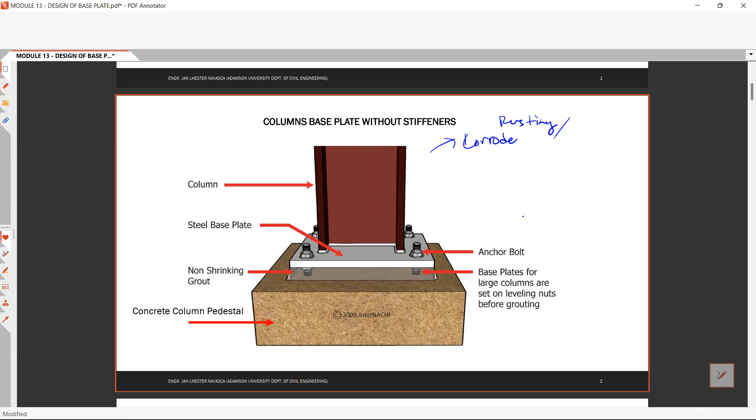You also need to provide non-shrinking grout, meaning you need to provide grout or spacer between the column pedestal.

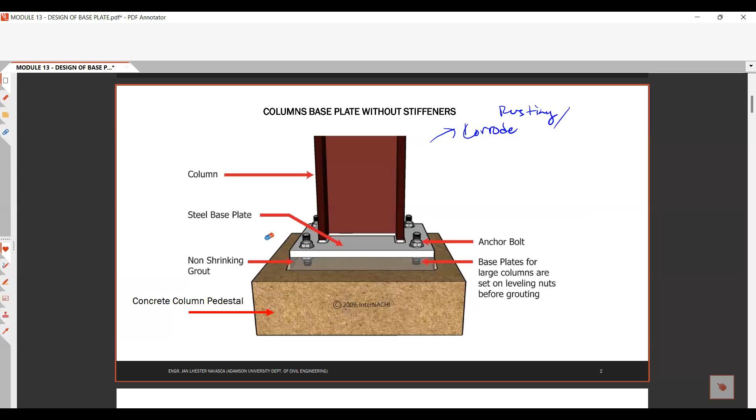For the non-shrinking grout, its purpose is to provide spacing between the steel base plate and the concrete column pedestal. You need to provide non-shrinking grout so that the pressure becomes equal, so it won't settle more on one side versus the other, because you provided a non-shrinking grout in between the steel base plate and the concrete column pedestal.

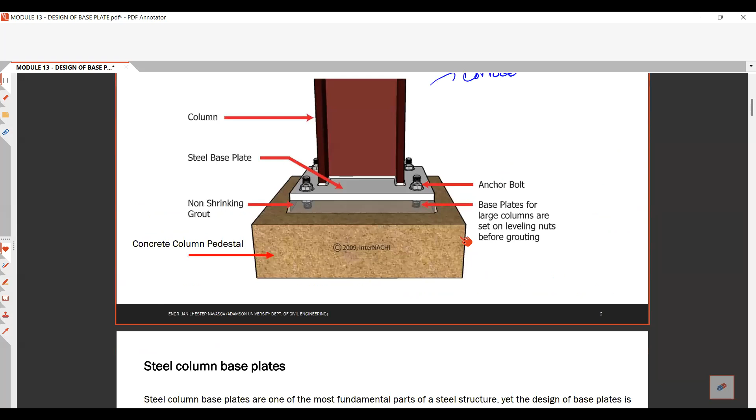So how the anchor bolt is attached in the concrete column pedestal: before you cast concrete, before you pour concrete, the anchor bolts need to be ready already.

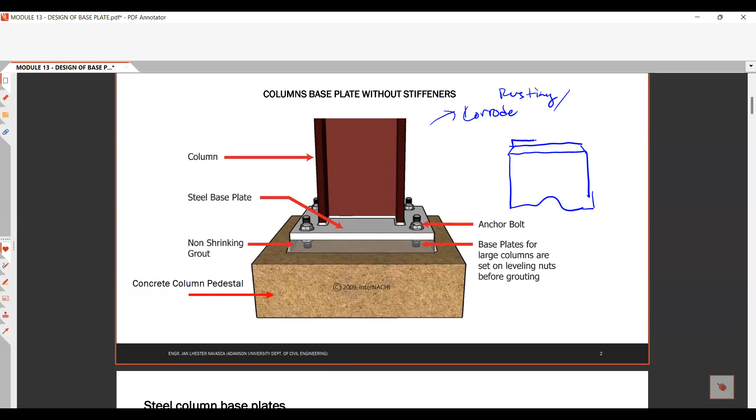So here's what it looks like, class. This is the section of the column. This is your non-shrinking grout and this is your steel base plate. Then the anchor bolt looks like this inside - this is an example of an anchor bolt.

Then it has embedment. The minimum embedment, class, is 17D, or 17 times the diameter of your bolt. That's the typical embedment length of your anchor bolt.

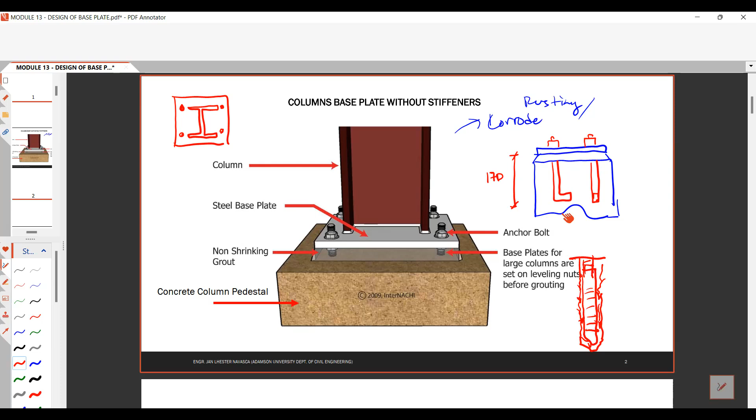Then you provide adhesive or chemical adhesive which has very high strength, so there's adhesive on the ends. Those are the key instances when the contractor or builder did not provide a column anchor bolt in the pedestal.

The steel column base plate is one of the most fundamental parts of the steel structure, yet its design is commonly not given much attention by designers or engineers. This results in base plate details that are expensive and difficult to fabricate, and may even contribute to hazards in the steel erection process by not providing stability for directional loads applied to the column.

In my own experience, it's really hard to find the design approach for steel column base plates, especially when you have bending on both axes. It's not very well known among authors, because typically the design of steel column base plate covers only axial load, with no bending.

That is why some engineers, before I was exposed to this kind of experience designing special structures, like fresh grads, are not well versed in designing steel column base plates, especially when you have moments. That's why sometimes the steel column base plates end up over-designed.

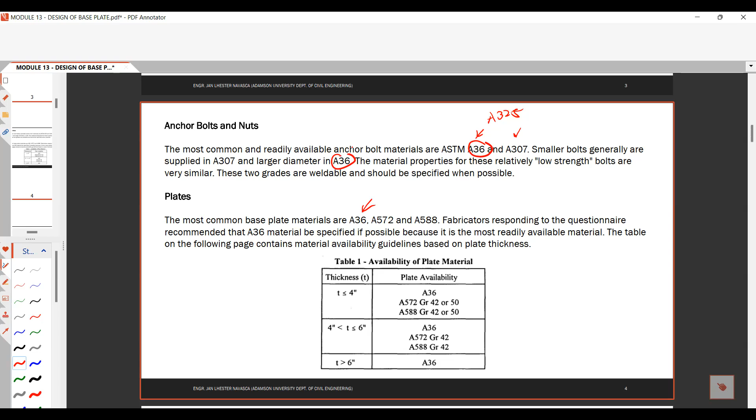The most common base plate materials are A36, A572, and A588, and especially in the Philippines, the most common type of steel is A36. Fabricators responding to the questionnaire recommended that A36 material be specified if possible because it is the most readily available material. These tables show material availability guidelines based on thickness.

For A36, the thickness varies from 4 inches and below. There's A36 steel, and also A572 and A588 available. Between 4 inches and 6 inches, there are also three options: A36, A572, and A588. However, for a thickness greater than 6 inches, or 150 millimeters, the only one available at that thickness is A36.

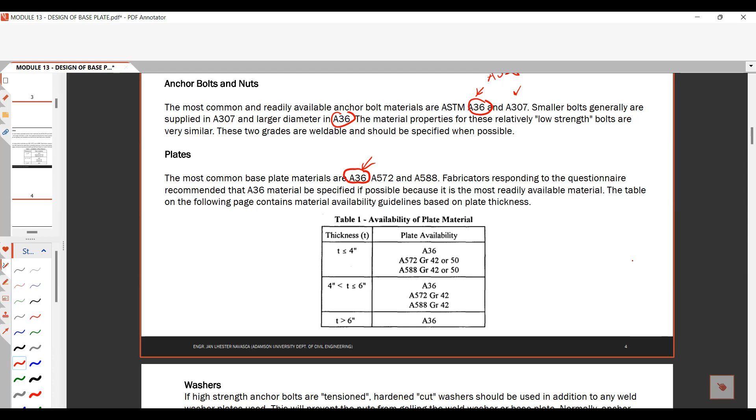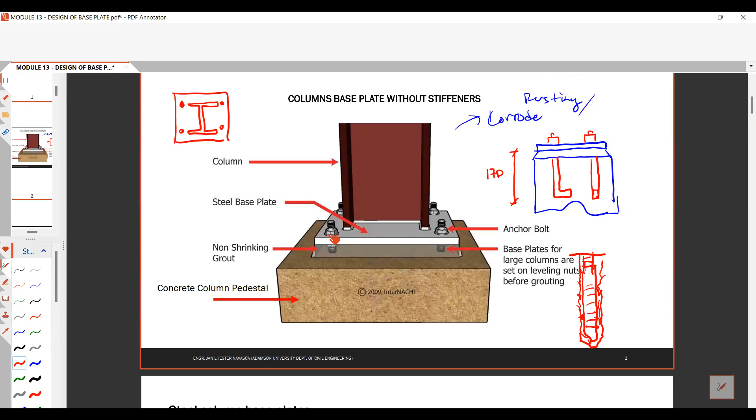For the washers — you all know what a washer is. Do we have a drawing? This one, here — this is the washer. That's the washer. These are the cylindrical parts, and here are your anchor bolts. Then you have the washer in between. So what is the purpose of the washer?

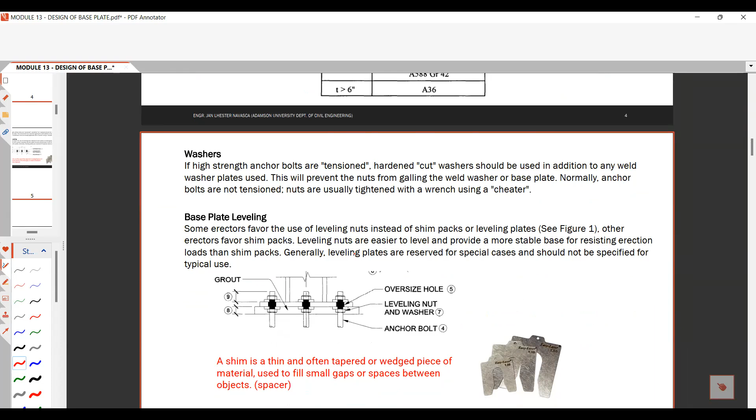If high strength anchor bolts are tensioned or hardened cut, when we tighten our bolts, it creates pre-tensioning, it creates tension. For example, this is your anchor bolt, then you tighten it. The free body diagram of that, class, will show tension here — a clamping force, right? It creates a clamping force that clamps your steel base plate.

Okay, it clamps your steel base plate.

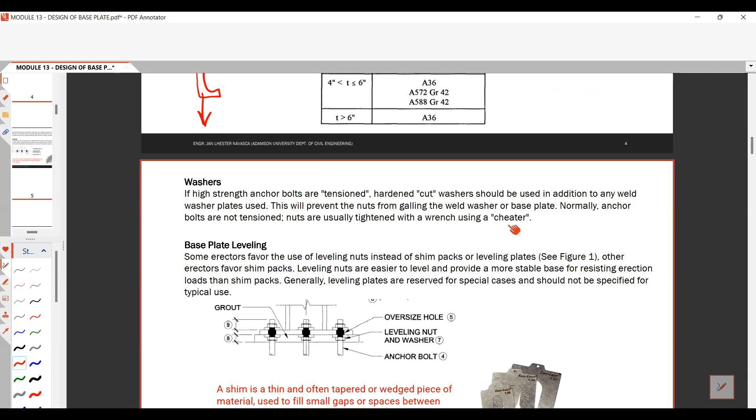The washers should be used in addition to any weld washer plates used. This will prevent the nuts from galling the weld washer or the base plate. Normally, anchor bolts are not tensioned, and nuts are usually tightened with a wrench using a cheater. So basically, the washer is to prevent your nuts from, what you call this, para hindi masyadong magalaw yung inyong nuts kapag tinighten nyo yung inyong anchor bolts, hindi siya masyadong magalaw. So that is the purpose of the washer, kasi meron yang pre-tensioning force.

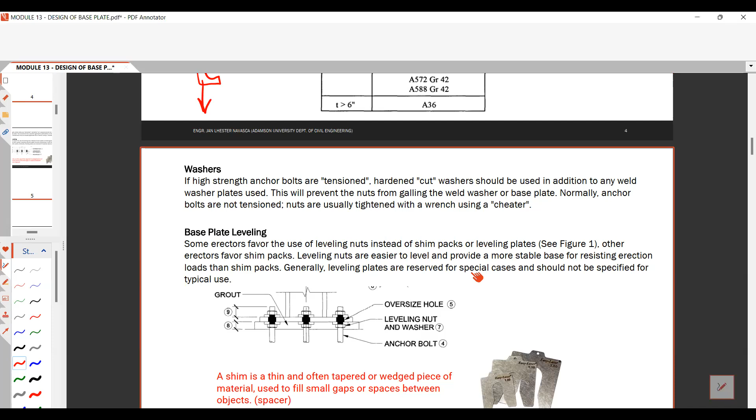And also we have the base plate leveling. Some erectors favor the use of leveling nuts instead of shim packs or leveling plates, see in this figure. Other erectors favor the shim packs. Leveling nuts are easier to level and provide a more stable base for resisting erection loads than the shim packs. Ang leveling and the shim packs ay para magpantay ng inyong nuts. For example, naka-incline na ganyan yung inyong nuts - this is exaggerated lang, naka-incline na ganyan. Sa base plate leveling or the shims, ito yung shims, para ma-level nyo yung inyong nuts. So that is the purpose of the shim packs.

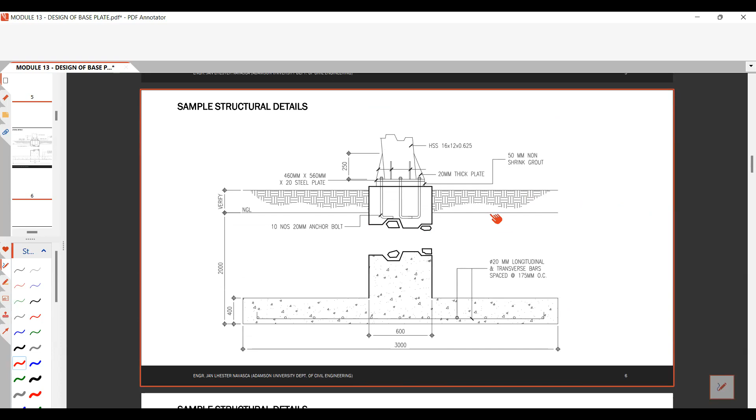And also, this one is a sample structural detail of an anchor base plate. So ito yung mga nakikita nyong detail sa mga plans kapag meron kayong example project, let's say you're working in a company. So ganito yung itsura niya. So marami tayong mga format. Okay, wait lang class, may dadaan na kandidato.

Maingay. Sa lugar nyo ba, marami na rin bang umiikot na mga kandidato? May mga kanya-kanyang jingle, tama ba?

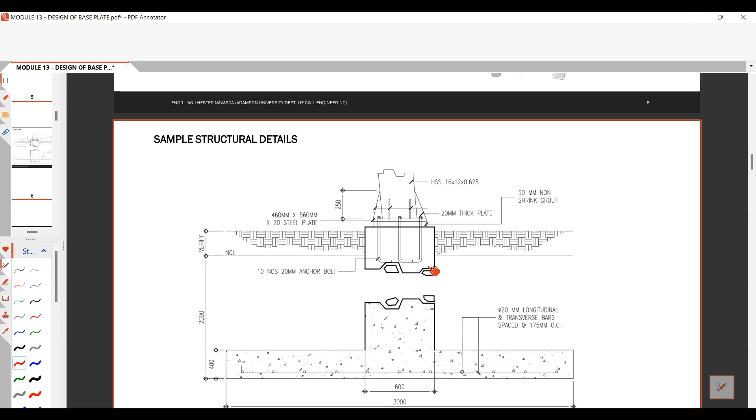Anyway, sige, start natin. This one is a sample structural detail. In this figure, this is a 600 by 600 column pedestal. Papansin nyo, ito yung column pedestal nyo with 460 by 560 base plate, with 10 pieces, 20mm anchor bolt, using a 20mm thick plate. And ito yung layout ng anchor bolts. And also take note that you have stiffeners, stiffeners, stiffeners, stiffeners, and this one, stiffeners.

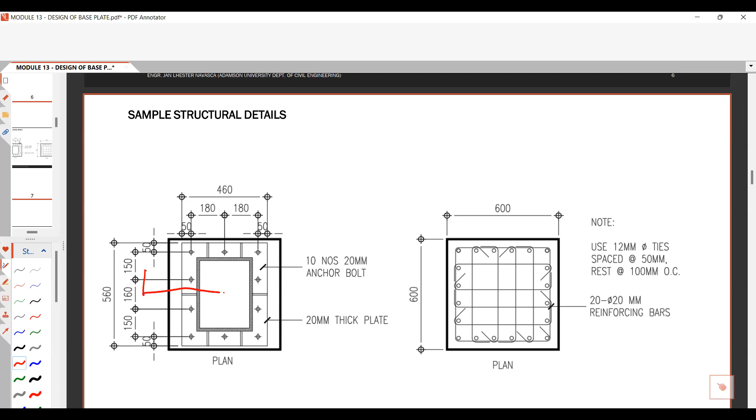So kung titingnan niyo, this one is yung plan view - this is for the concrete column pedestal and this one is for the base plate. And this one is the section view. So as you can see, you have an anchor bolts. So if we cut a section dito, we have a cut ng section dito. Take note, this column is an inclined column - inclined yan, that is an HSS 16 by 12 by 0.625. So this one is your anchor bolt, naka-drawing dito.

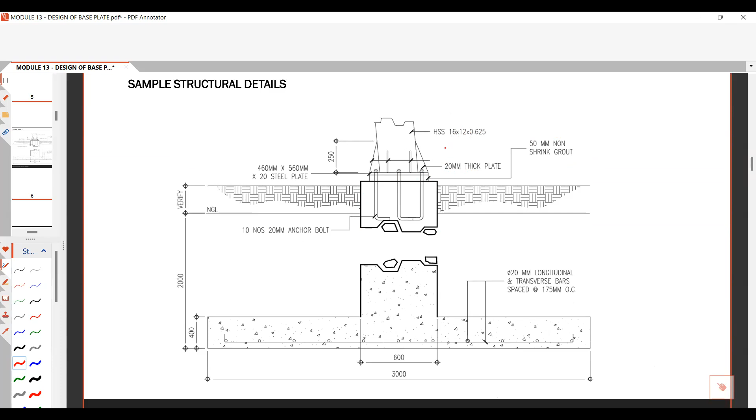Then the engineers, the designer provided 50mm non-shrink grout, using a 20mm thick plate, and the height of your stiffeners is 250. And for the foundation, you have a 3,000 millimeter width of your foundation with 20mm longitudinal bars, transverse along with spacing of 175mm center, with 400mm thick. So yun yung mga how to detail your base plate - starting from foundation to column pedestal to steel base plate to the column, then yung inyong orientation of the section, yung mga layout.

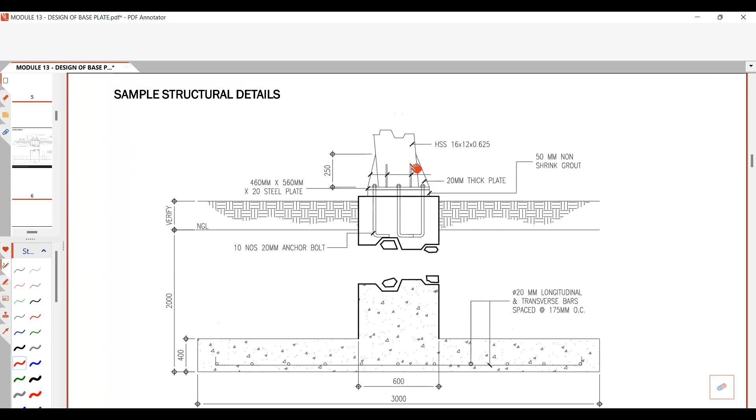So what is the purpose of the stiffeners? The stiffeners class is to provide additional section modulus to your base plate. Again, the stiffeners is to provide - yung pinaka-specific is to provide additional section modulus, so mas lalaki yung section modulus ng inyong base plate. Pero yung pinaka-sagot is to provide additional capacity to your base plate, bending capacity to your base plate. So bakit nagkakaroon ng additional stiffness?

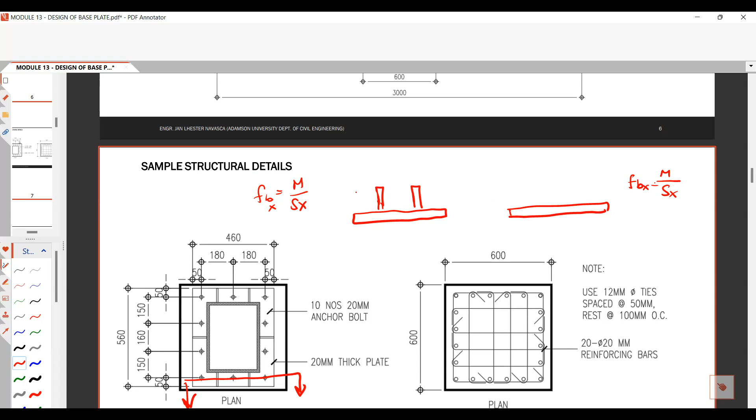Let us cut this section. Kung titingnan nyo yung section na yan, meron kayong steel base plate, meron kayong stiffeners, and stiffeners - yan yung makikita nyo. Pero kung walang stiffeners yan, ang makikita nyo lang ay steel base plate, no stiffeners. So therefore, kapag i-check nyo yung bending stresses, that is equals to moment over section modulus - let's say this is in X, let's say it's the same, let's say in X. So mas malaki di hamak yung section modulus of base plate with stiffeners compared to the base plate without stiffeners. So therefore, lalaki yung bending capacity of your steel plate. So that is the main purpose of stiffeners.

So let us go to designing our steel base plate. The way we design our steel base plate is first, kailangan mong i-consider yung column pedestal.

Bakit kailangan mo i-consider yung column pedestal? Because your steel plate is resting on the concrete column. So if you did not consider your concrete bearing strength, yung bearing strength of your concrete, so this is your concrete.

Hello. Hello? Ayan, bumalik na ba ako, class? Hello, naririnig na ako.

Yes po, sir. Okay, so yung bearing class is siya yung bearing strength ng nakapatong yung inyong column as the steel base plate dun sa inyong concrete. So the forces is yung bearing strength. Kapag hindi nyo consider yung bearing ng concrete nyo, ang mangyayari, yung steel base plate mo kaya pa, pero magkakaroon ng cracking dun sa inyong base plate because the bearing strength nito hindi niya kaya.

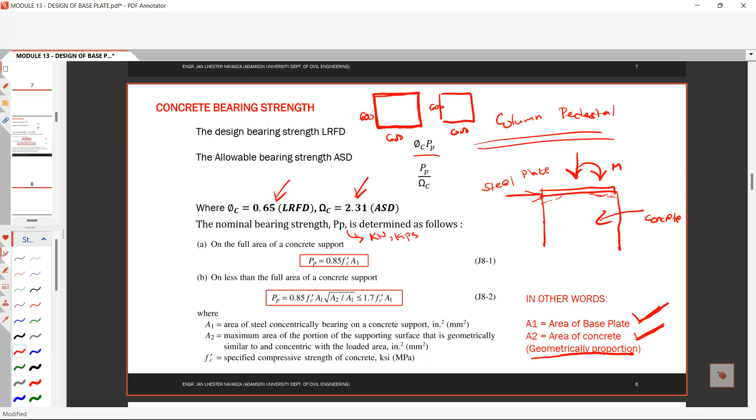Meaning yung geometrically proportioned, for example, meron kang 400 by 400, and your ano is 600 by 600. So hindi mo pwedeng i-consider that your A sub 2 is 600 by 600. You need to check if geometrically proportioned ba itong 400 by 400 to the 600 by 600. So later on mag-discuss tayo paano yung pag-compute ng geometrically proportion.

So again, you need to solve for the concrete bearing strength of your column pedestal, to determine kung kakayanin ba ng forces na yun. So dito muna tayo sa number 1, by means of the column pedestal.

Okay, so area 1, example 1: a W10 by 49 is used as a column and is supported by a concrete pier as shown in this figure. Minsan, ang concrete pier and the column pedestal is the same, so that's the term used for them. The top surface of the concrete pier is 18 by 18 inches, using a steel base plate of A36 with plate 13 by 13 (PL 13x13). Check if the concrete pier is capable to resist a dead load of 98 kips, a live load of 145 kips, and the compressive strength of your concrete is 3000 PSI. Design using LRFD or design using the ASD.

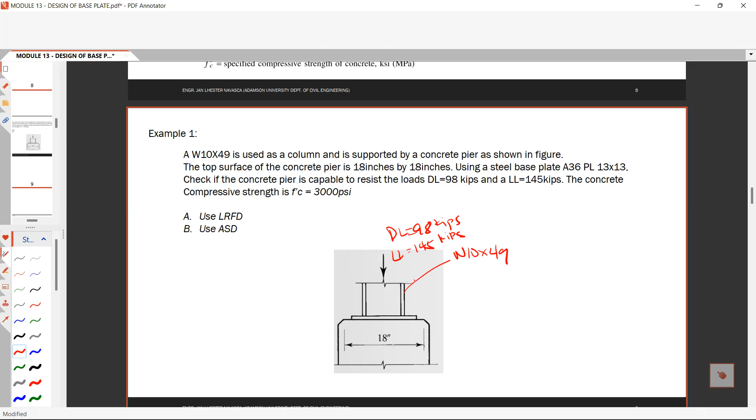So first, let us solve for the demand load. Considering load combo 1, which is U1: 1.4 dead load, or 1.2 dead load plus 1.6 live load. This is solving for an LRFD solution. So 1.4 dead load gives 137.2, and 1.2D+1.6L gives 349.6 kips. Therefore your P sub U, the ultimate demand actual load, is 349.6 kips. Let's set that aside for now.

Now finding A sub 1 and A sub 2. Your A1 is the area of the base plate, which is 13 by 13 inches, so that is 169 square inches. And your A2 is the area of your column pedestal, which is 18 by 18, so that is 324 square inches. Since your area 1 is not equal to your area 2 — meaning, in other words, there's a case where A1 equals A2, and this case where A1 is not equal to A2.

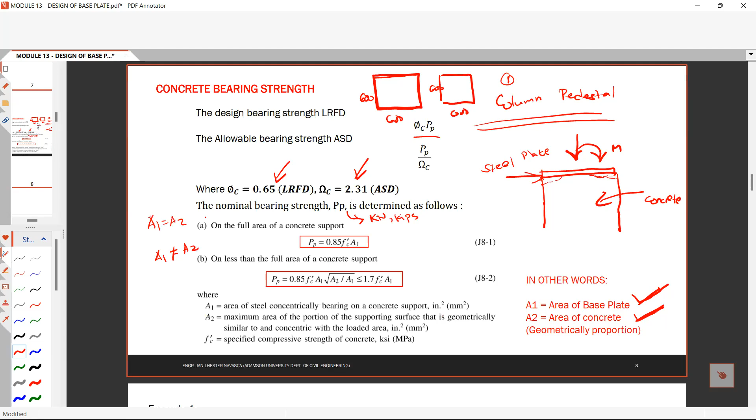So since your area 1 is not equal to your area 2, therefore your bearing strength is based on equation J8-2. You can find this in the AISC section, section J8. That's our section, so therefore we need to use this formula.

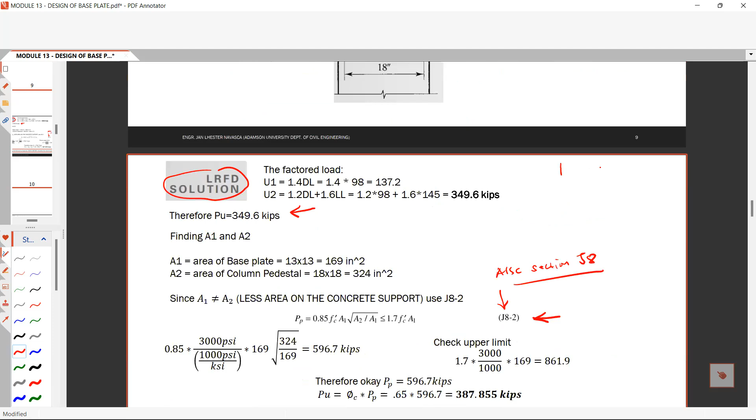Solving this formula: 0.85 F prime C times A1. Take note, class, that your compressive strength is in PSI, pounds per square inch, and to convert pounds per square inch to kips per square inch, divide by 1,000. So 1,000 PSI is equal to 1 KSI. 3,000 divided by 1,000 is 3 KSI, multiplied by area 1, which is 169, multiplied by the square root of A2 over A1, which gives 596.7 kips.

Then check your upper limit. According to the equation, your upper limit is 1.7 F prime C A1. So 1.7 multiplied by F prime C (3 KSI) multiplied by area 1 (169) gives 861.9 kips. Since your actual value is less than the upper limit, you choose 596.7 kips. Therefore your P sub P is 596.7 kips, and this is your nominal capacity.

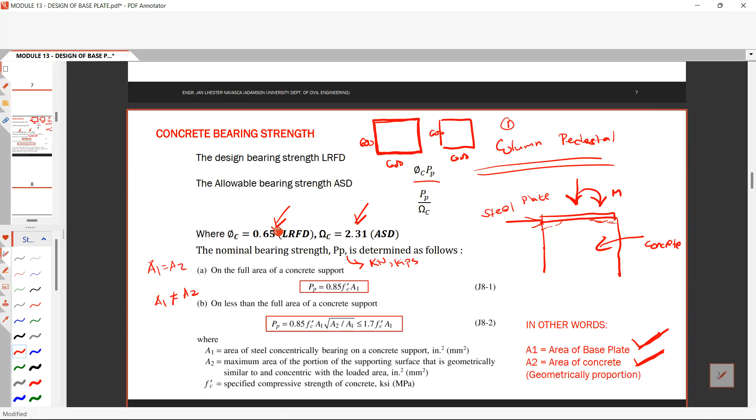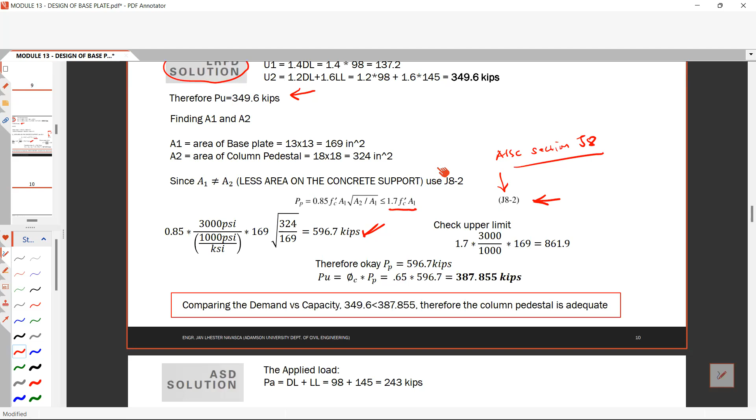To determine the ultimate capacity in LRFD, you need to multiply by the resistance factor phi sub C, which is 0.65. So your P sub U is equal to 0.65 multiplied by 596.7, giving 387.855 kips.

So let us compare the demand versus capacity. This is your capacity based on the concrete bearing strength, and this is your demand load. Comparing capacity to demand load, 387 is greater than 349. So what can you say? Therefore, the column pedestal is adequate based on the LRFD solution. So our concrete bearing strength can indeed handle the 98 kips dead load and 145 kips live load.

So let us check in the ASD solution, the ASD design philosophy. In ASD, the demand load uses a load combination of dead load plus live load — just sum them: 98 kips plus 145 kips equals 243 kips. Now let us find the capacity again, finding A1 and A2. Area 1 is the area of your base plate, 13 by 13, that is 169. And area 2 is the column pedestal, 18 by 18, that is 324.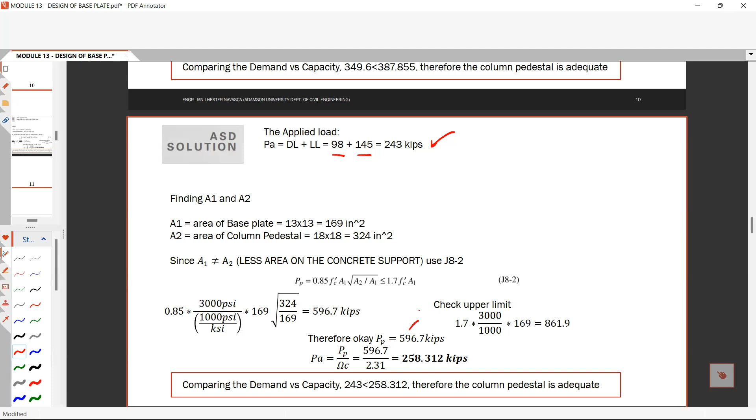Since your A1 is not equal to A2, you have this equation, J8-2, and the same to convert to find your P sub P, you have 596.7. Since we know the nominal, divide by the omega factor 2.31, you get your allowable capacity, which is 258.312 kips. Comparing demand versus capacity, 243 divided by 258, 243 is less than 258. Therefore, the column pedestal is adequate.

Let us check the DCR, the demand capacity ratio. You have 243 divided by 258.312. You get your DCR, that is 0.94.

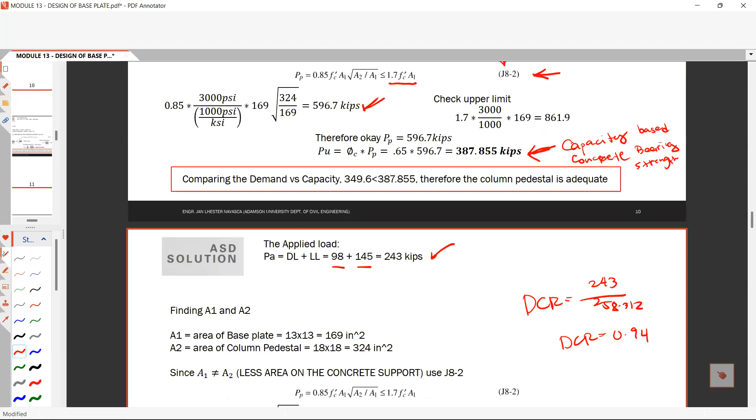And the other one, your DCR based on LRFD is 349.6 divided by 387.855. You get 0.901. So this will be your demand capacity ratio. Since they are both less than 1, they are safe.

That is how you get your capacity based on the concrete bearing strength, the capacity of your base plate based on the concrete bearing strength.

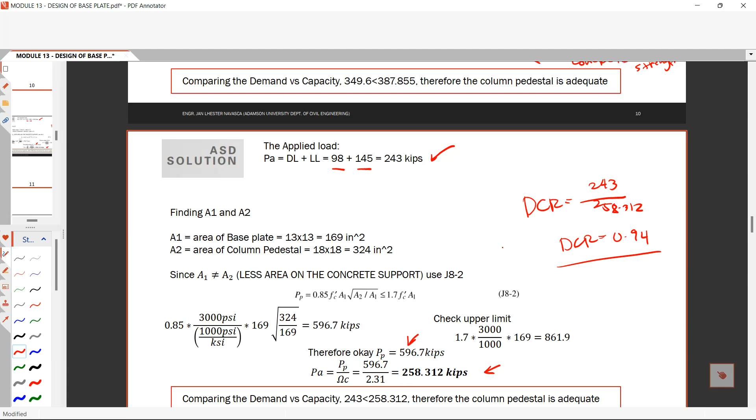To compute the column base plate required thickness, since this is pure axial only, we are not considering bending on the x and y axis of your column pedestal. The formula for the thickness: thickness should be greater than or equal to L multiplied by 2PU over 0.9 FYB times N. This is the new formula for LRFD since NSCP 2015.

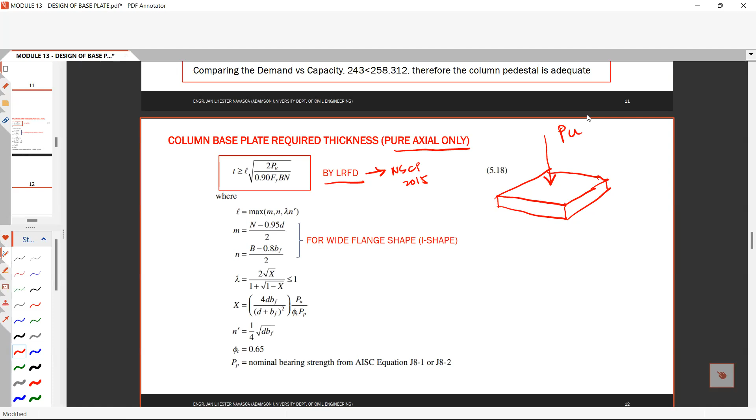So this is your base plate, and this is your actual load PU. Let's say that is the actual load PU. And the distance, the dimension here is B, and this dimension is N. So this is the steel base plate with a thickness T.

The design of the required thickness is based on the cantilever method. Why is it called the cantilever method? Just like in designing your steel, just like in the design of your foundation, the assumption is the connection between the column and the foundation is rigid. So it's the same here - the assumption is that the distances are rigid. There is a certain portion that has a rigid assumption.

This means it cannot deform. So when you apply a load there, the deformation lifts evenly on both sides, it lifts equally on the other side as well. It's like when you apply a load here, it opens up on the other side. So the assumption is the rigidity at this point - since that is rigid, if you recall in your theory of structures, when one part is rigid, you can assume it as a cantilever.

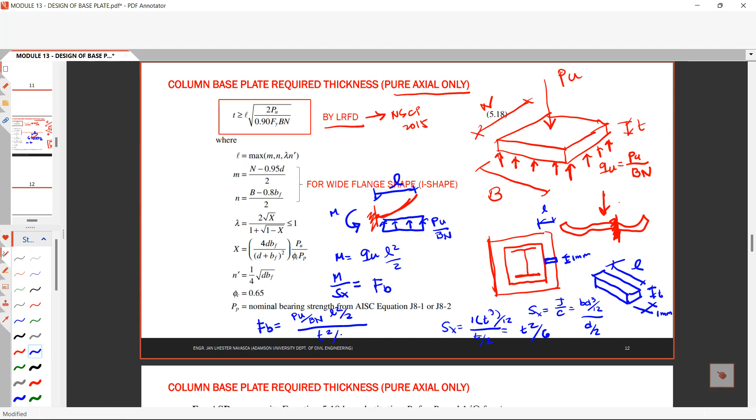Kung meron sa inyo nakakaalala ng bending stress kapag square, maximum bending stress kapag square, that is 6M over BD squared. Naalala niyo pa yan? That is the bending. So parang ganito lang din yan. 6M over BD squared, so palitan niyo lang ng M ng Pu over Bn times L squared over 2.

6 times Pu over Bn times L squared over 2, divided by B, which is 1 millimeter. B is T squared. And your FB is assumed to be 0.9 Fy.

So therefore, to solve for T, that is equals to T squared is equals to 6 Pu over Bn, yung L squared over 2. Yung 6 divided by 2, that is basically pwede na natin gawin tong 3, and that is 0.9 Fy. Therefore your T is equals to the square root of 3 Pu L squared over 0.9 Fy Bn. Parang ganito lang din yan.

Ang problem lang ngayon, this is yung pinagmulan ng formula ng LRFD ngayon, the NSCP 2015. But this formula is using the NSCP 2001. Dito nagmula yun. This is the NSCP 2001, 3Pu L squared over 0.9 Fy B times N.

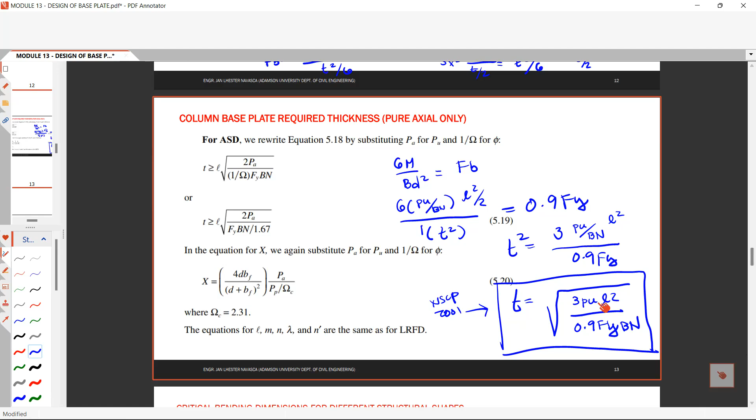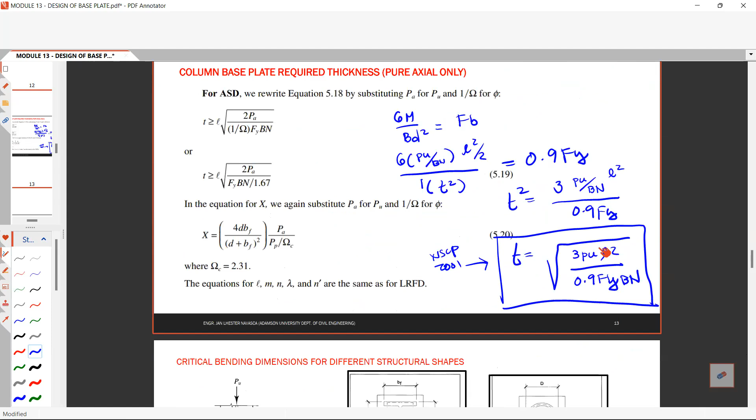So for the sake of, parang, updated tayo sa ating the way we design, we will use this, we will adapt this one. Yung L squared dito pwede mong i-factor out, so square root of L squared is L, so that is why you have L. Then take note class, yung 3Pu na yung ginawa nilang 2Pu and 0.9 Fy B times N. So this is the straightforward required thickness of a column base plate.

So kapag meron kayong stiffeners class, the way we compute for the required thickness is the same theory, M over Sx is equals to Fb. You just need to solve for the section modulus. Diba ang section modulus this time, kapag may stiffeners ka, is ganito with, let's say, meron kang stiffeners on the two sides. Ganyan lang, kailangan mo lang isolve yung section modulus.

Okay, and what is that length L? Ano ba yung length L na yun? Hindi ko nasabi yung length L na yan. Yung length L class, siya yun daw yung effective length na kung saan yun daw yung rigidity, doon yung rigid yung base plate. So ibig sabihin hindi siya nagbe-bend doon. Yun yung assumption. So yung L na yan is the maximum of M, your N, and lambda N prime.

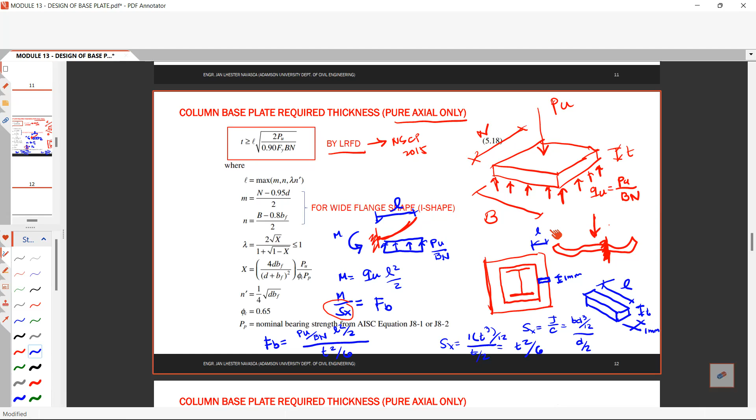Okay, so what is M? What is N? And what is lambda N prime? Your M is equals to N minus 0.95D over 2. Okay, this one, this is the critical bending dimensions for different structures. So sa wide flange, sabi niya dito, ito yung M, ito yung distance. Yung distance M is basically N minus 0.95D over 2, okay, this is your distance.

Okay, so this is your distance M. And this is your distance N.

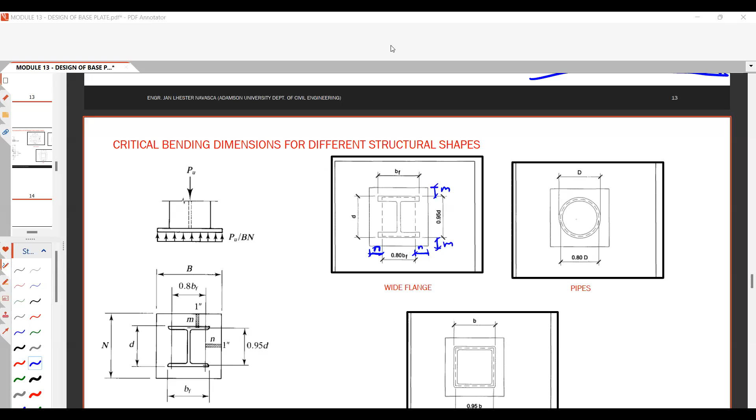Okay, so yung length L daw na yon, that is the critical dimensions for bending. Yung length M, ayan yung natitirang distance na yan, and yung length N, yan yung natitirang distance na yan. So according to the critical bending dimensions, 80% of your Bsub F and 95% of your total depth of the wide flange is effective. So this is only for wide flange.

Sabi niya, yun lang daw yung effective. So kunwari, meron kayong wide flange with steel plate. Ang effective lang daw is itong area na to, ito daw yung portion kung saan lang siya rigid. At that portion is 95% of D and that portion is 80% of your BF. So yung length na to, syempre, kung kukunin mo yung length na yan, that is the same, that is 0.95D, that is M.

So to solve that, this is your N, always. And this is your B. So therefore, your M is equal to N minus 0.95D, divided by 2. That's how you get your total length M.

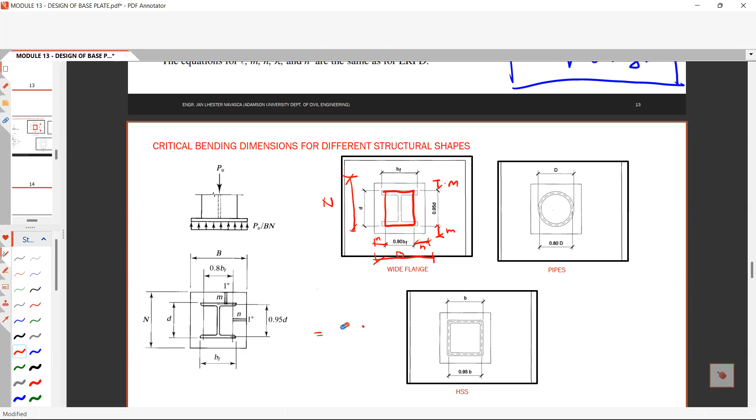So for the other formulas, which is lambda, the lambda class depends on this formula: 2 square root of x over 1 plus square root of 1 minus x, which is less than or equal to 1. This will tell you if your base plate is heavily loaded or lightly loaded. If you compute and the class is greater than 1, your steel plate is heavily loaded. If it's less than 1, that is lightly loaded.

So for the formula class, you should not increase beyond 1. And the formula for your X is 4 times D times BF over D plus BF, PU multiplied by PU over phi sub C PP, or what you call the demand capacity ratio. This is your DCR.

So let me write that, that is your DCR: P sub U over phi sub C P sub P, basically that is your demand capacity ratio, based on the bearing we discussed earlier. So that is your X. D is the depth of your wide flange, and BF is the width of your wide flange.

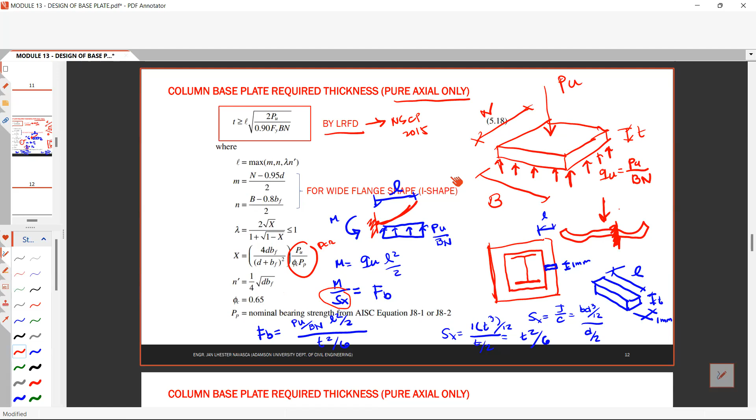Solving for the nominal bearing strength capacity is from equation J8-1 or equation J8-2, which is exactly this one. This is your equation J8-1 and equation J8-2. So that is how you solve for the required thickness. Then for ASD,

the required thickness is given by this equation: 2 PA divided by 1 over omega. This is because

in ASD, our capacity is phi Fy in LRFD, but in ASD your capacity is Fy over omega. That's why that is your FB. That is your FB. So that is why in ASD it's Fy over omega, and that's why you have Fy over omega here.

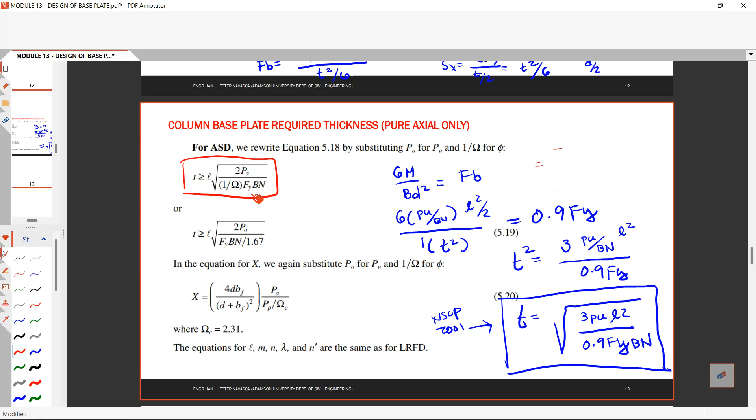So the required thickness in ASD is T should be greater than or equal to the square root of 2 times P sub A divided by 1 over omega multiplied by Fy times B times N. If we substitute the value of omega, which is 1.67, you have this equation: T should be greater than or equal to the square root of 2PA over FYBN times 1.67.

So in the equation for X, we again substitute your P sub A for PU, and 1 over lambda or 1 over omega for the phi. So when solving for X here, it's the same equation, but your P sub U now changes to P sub A, and your capacity now changes to P sub P over omega C. So basically this is also the DCR, demand divided by capacity. Don't worry about this, you already know it's demand divided by capacity.

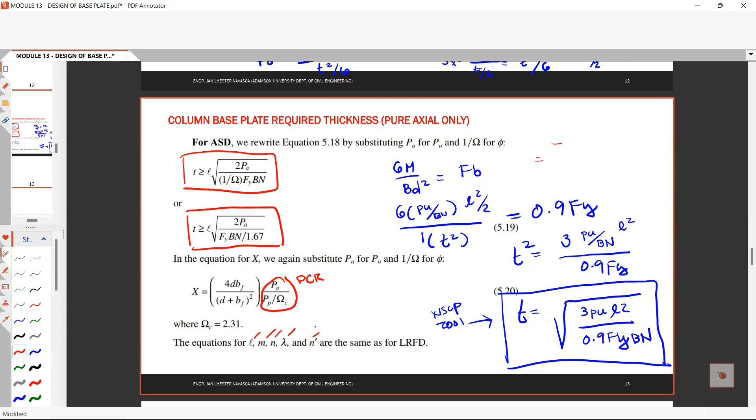And take note that the factor omega sub C is 2.31. The equations L, M, N, the lambda, and the N prime are the same for LRFD. The same computations for these values apply to ASD.

So the critical bending dimension depends on the column type used in the design. If the column used is a wide flange, the critical bending dimensions are 95% effective depth and 80% BF. That's the critical boundary between rigid and non-rigid base plate. And for pipes, the critical bending dimensions are 0.8D, or 80% of the outside diameter.

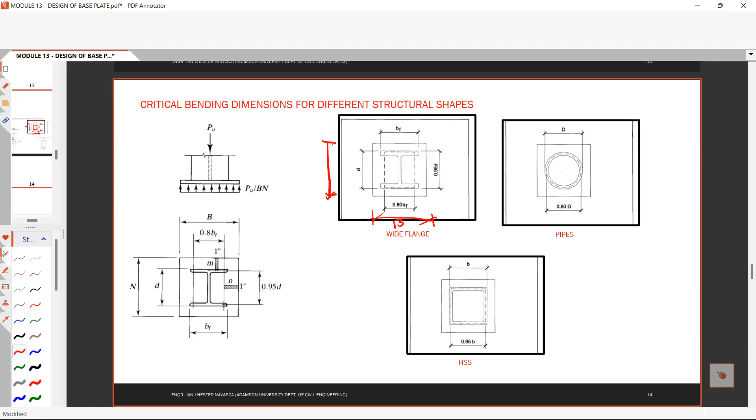And for HSS, that is 95% of the outside width, or 0.95B. Take note, when your drawing looks like this, that is your B. The B is always along the X, and the N is always along the Y. So those are the dimensions B by N of your steel plate.

So as I mentioned earlier, here's how to come up with the required thickness, using this one.

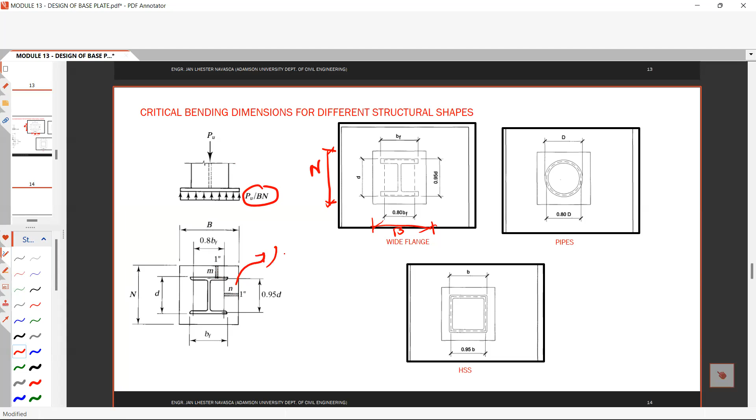You have your P_u, the assumed condition, which is uniform pressure since it's axially loaded, and considering 1 inch wide or 1 mm wide, or 1 unit dimensions, you have this one. You can use M or you can use N. The notation I used is L, since L is the maximum of your M, N, and lambda N prime.

Do you have questions regarding the design of the required thickness for the base plate? Any more questions?

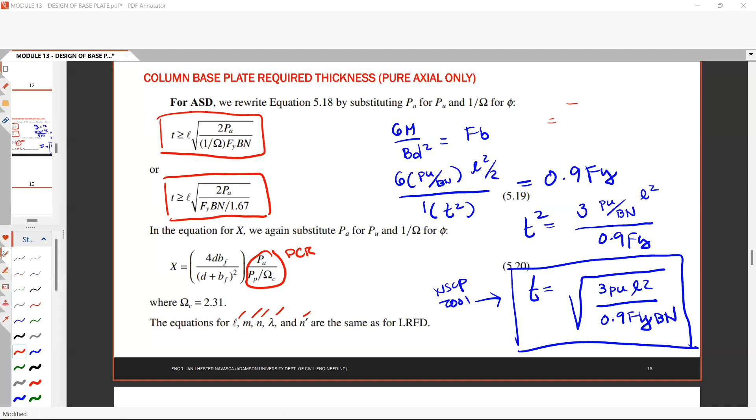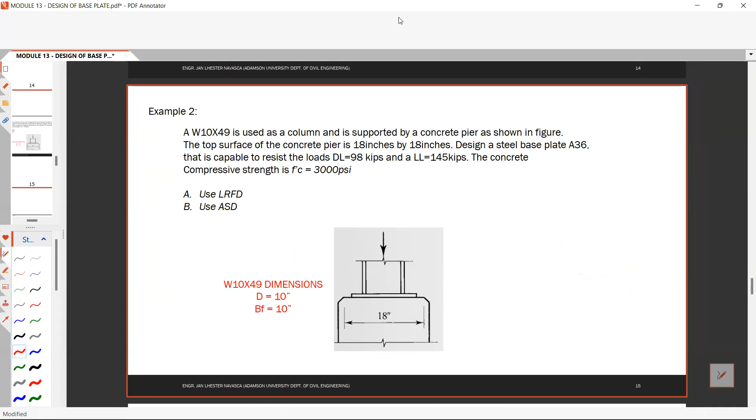Okay, let's try to compute an example problem. This time we are designing our steel plate. Can you see the screen? Yes, sir. Now let's design our steel base plate. What we need here are the loads, the dimensions of our pedestal, and what compressive strength we will use. If you notice, this is the same problem as example 1.

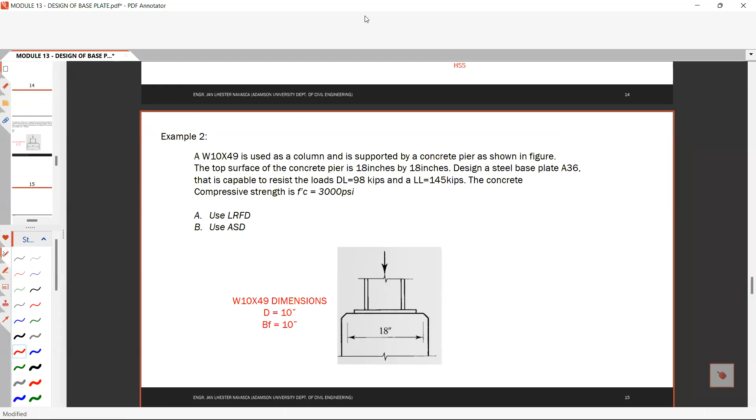This time we are going to find the thickness of your steel base plate. A W10 by 49 is used as the column and supported by a concrete pier as shown in this figure. The top surface of the concrete pier is 18 inches by 18 inches. Design your steel base plate with A36 steel that is capable of resisting a dead load of 98 kips and a live load of 145 kips. The concrete compressive strength is 3000 psi. Design using LRFD and design using ASD.

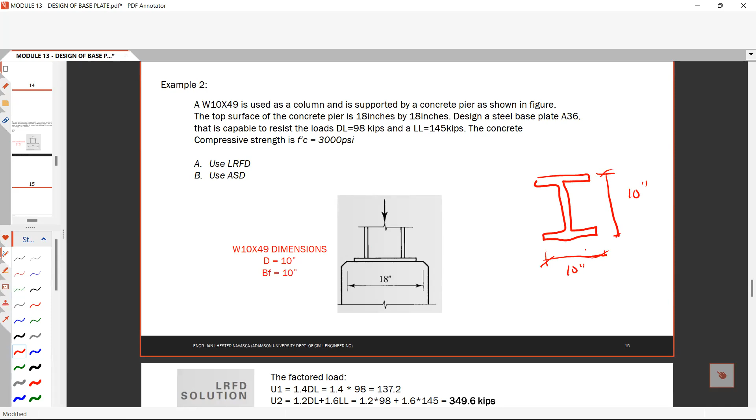The W10 by 49 has dimensions of 10 inches by 10 inches. That's the total depth, this is our W10 by 49. Your total depth is 10 inches and your total width is 10 inches. So those are the dimensions of your W10 by 49.

Let's go back to finding the demand load. To find the demand load using load combinations 1.4 dead load, and 1.2 dead load plus 1.6 live load, the governing load combination gives us 349.6 kips.

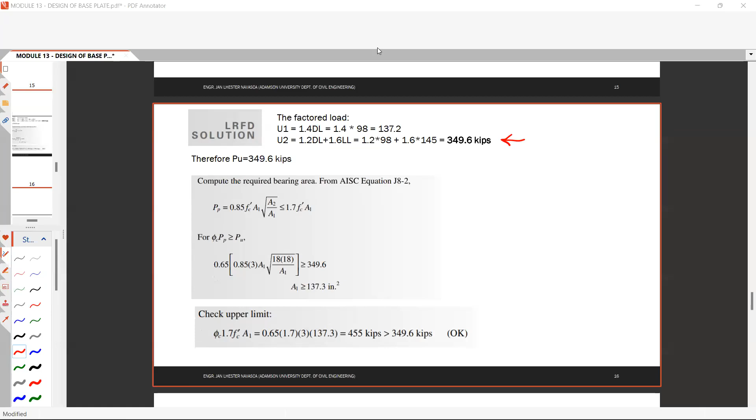Okay, let's continue, I'll go faster. So, compute the required bearing area from the AISC equation J8-2.

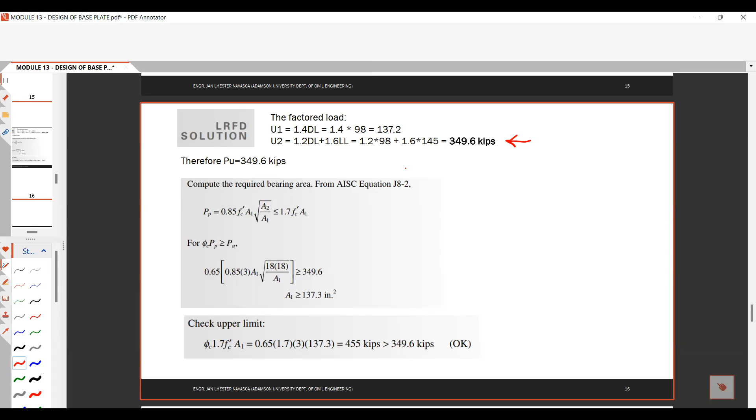Since your required area is unknown, you will use equation J8-2. Let's compare this equation: 0.85 F'c A1 times the square root of A2 over A1 should be less than or equal to 1.7 F'c A1. Your A1 is the area of your steel plate, and your A2 is the area of the concrete column pedestal.

Since what we want to design is such that the areas are not equal, using equation J8-2, with a phi of 0.65, our goal is that the capacity should be greater than or equal to the demand. So to get the limiting value of A1, we compare the capacity to the demand and equate that value. Your P_p using equation J8-2 is 0.85 times 3 times A1 times the square root of 18 times 18 over A1, which should be greater than or equal to 349.6 kips. Solving for this, your A1 is 137.3 square inches. Your A1 should be greater than or equal to 137.3 square inches.

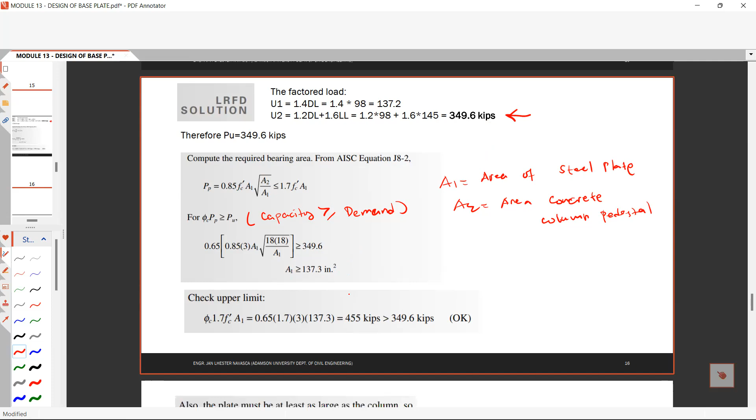So let us check the upper limit if A1 still falls on the upper limit. So phi sub C times 1.7 F prime C times A1. That's 0.65, 1.7, 3 KSI, giving 137.3 square inches. Therefore you have 455 kips, which is greater than 349.6 kips. So therefore, this is okay.

We're okay on our upper limit. So therefore, the required area 1, or the required area of steel plate, should be greater than 137.3 square inches.

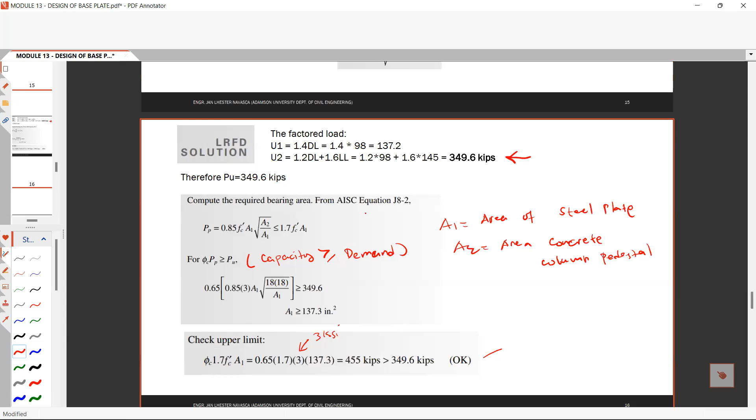Also take note that in choosing the area of your base plate, it should be smaller than or equal to your column pedestal. It's not allowed that, let's say, your concrete column pedestal is 18 by 18, but your steel plate is 20 by 20. That's not allowed because it's larger than the steel base plate should be. What would happen is the steel plate would overhang on the sides, which is wrong.

So therefore, your area 2 should always be greater than or equal to your area 1. And what is your area 1? Area 1 is BF times D, so that's 10 by 10, which is 100.

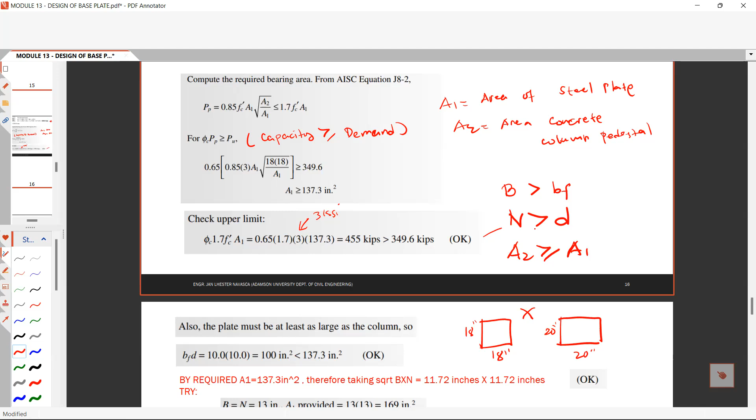So in words, your B of your steel plate should always be greater than your B sub F. And your N should always be greater than your D of your wide flange. Also, your area 2 should be greater than or equal to your area 1 — the area of your concrete should be greater than or equal to your area of steel plate.

So therefore, the required area 1 is 137.3. Taking the square root, B by N is 11.72. So let us try B by N equals 13 inches, and your area 1 provided is 169 square inches. So our design is 13 by 13.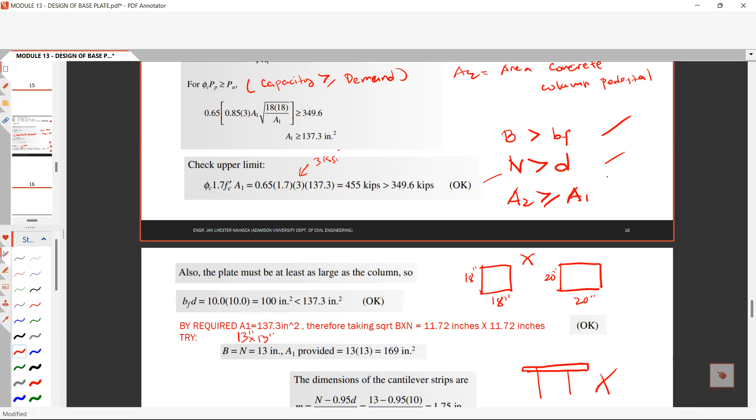So the 13 passes criteria 1, and 13 also passes on the side of D. Area 2 also passes against area 1 — your area 2 is 18 by 18 and your area 1 is 13 by 13. So it passes, satisfying this criteria.

Okay, dimension of steel plate. So that is how you check your dimension of your steel plate.

Since you now have your B by N, it passes the concrete bearing strength check, since that's where we got the required dimensions. Take note, your required dimensions of your steel plate come from the bearing strength of the column pedestal.

Now, to check for the thickness, we need to solve for the thickness of the 13 by 13. So the dimensions of the cantilever strip M, which is N minus 95% of D divided by 2, that is 1.75. And your N is B minus 0.8 BF over 2, that is 2.5 inches.

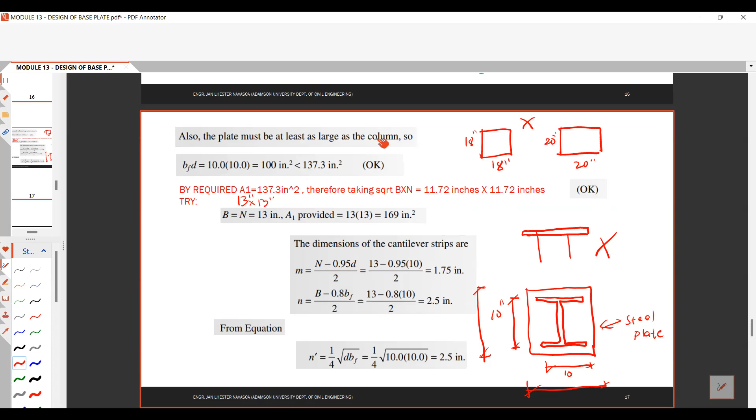And from the equation for N prime, that is 1/4 square root of D times BF. Your D is 10 inches, your BF is 10 inches — that is the dimension of your wide flange — and that equals 2.5 inches.

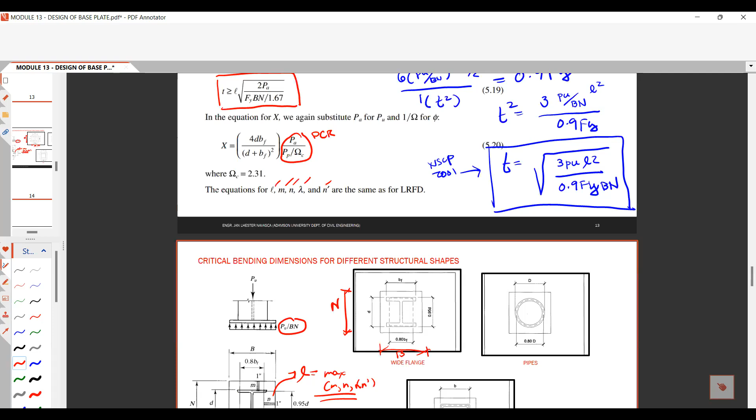Then you can solve conservatively for simplification, using lambda equals 1.0, or you can solve for the real lambda. According to the equation, that is 2 times the square root of x, over 1 plus the square root of 1 minus x. Also, let's solve for x first. Your x is 4 times d times BF, over d plus BF squared.

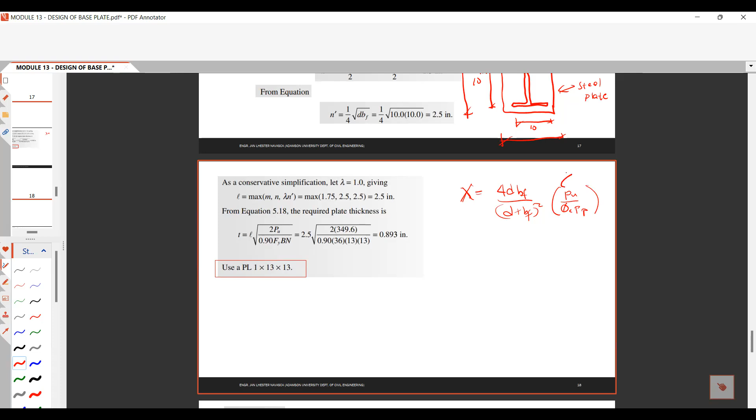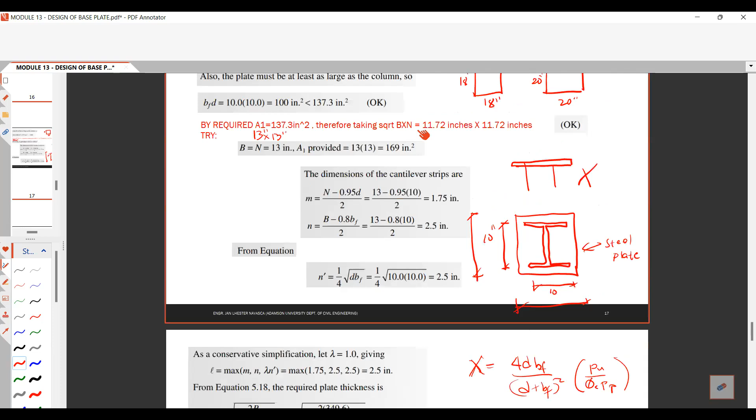Okay, or multiplied by the demand capacity ratio, or your Pu over phi c Pp. And your P sub u over phi c Pp is equal to 1.0, but actually hindi na siya equals to 1.0 since nag-round up tayo ng ating dimensions, kasi kung ginamit natin is B by N is 11.72, your capacity is increased, so ito liliit.

So ginawa nating 13 by 13. So you can solve for x and you can solve for lambda, and should be less than or equal to 1.0. But conservatively, for simplification, let us consider lambda to be 1.0.

So giving the maximum value of L, which is 1.75, 2.5, and 2.5, you get 2.5. And from this equation 5.18, the required plate thickness is given by T, that is L multiplied by the square root of 2 times Pu over 0.9 Fy BN. Take note, in A36, your Fy is 36 ksi.

So 2.5 multiplied by the square root of 2 times 349.6 kips, ito yung Pu natin, divided by 0.9 times 36 times B, which is 13, times N, that is 13, that is equal to 0.893 inch. And we can always round up.

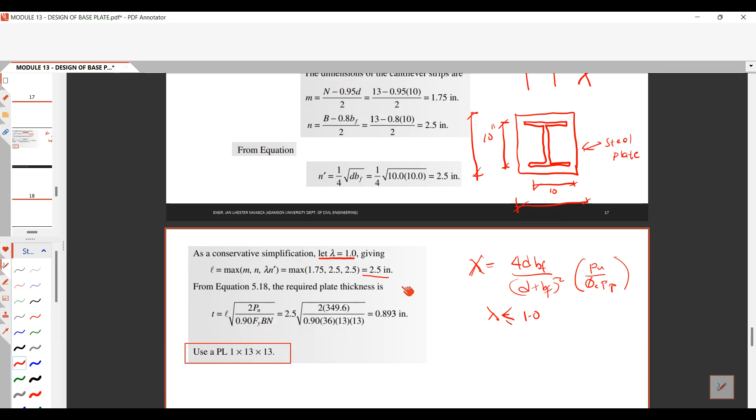Ito, sabi nga, T should be greater than or equal to this equation. So hindi ka naman makakabili ng 0.893 inches na steel plate. So what you can do is round up this value to a nearest 1/16 inches, or pwede mong gawin 1 inches na lang.

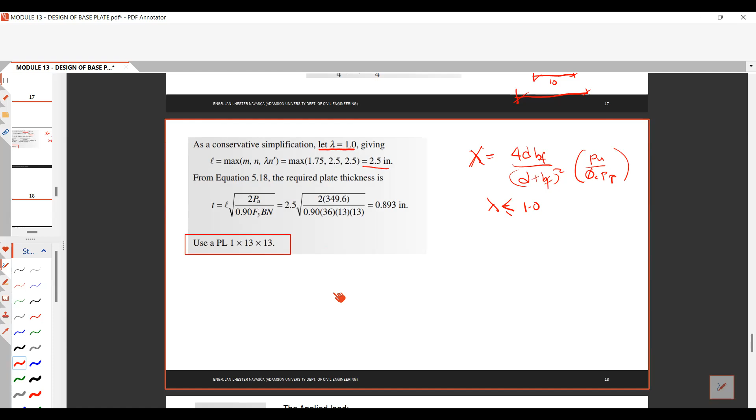Eksakto. So your PL is equal to 1 by 13 by 13. So that is how you solve for the required thickness of your base plate. And using the ASD solution, still the same, magbabago lang yung applied load or yung demand load.

So the demand load this time is 243 kips. And computing the required bearing area, so compare again the capacity to the demand to get for the required A1. So the required A1 for the ASD solution is 150 square inch.

And checking the upper limit, this is now also okay. 150 yung ginamit mong A1, na-solve mong A1. And you can also use B by N, that is 13 inches with 169 square inches. So yung required mo is 150 pero yung provide mo is 169, still okay.

So therefore you can use the 13 by 13. So you can try your m again, your n again, and your n prime, and you can conservatively use your lambda, which is 1.0. Therefore, you get your maximum length of the cantilever strip, which is L, that is 2.5 inches. And using equation 5.2, the thickness required is 2 PA over Fy BN divided by the omega factor 1.67.

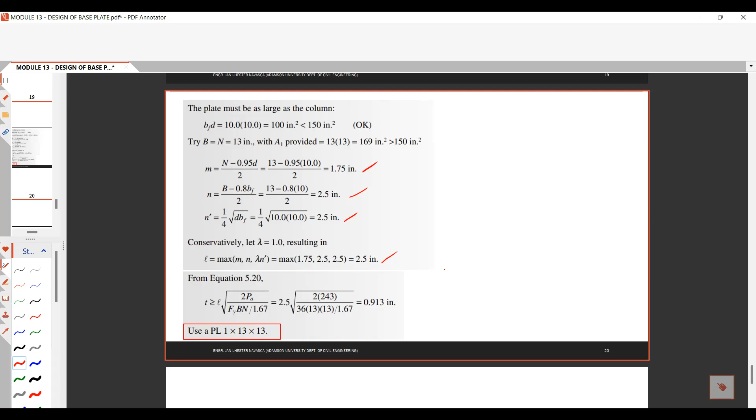And therefore, you have your 2.5 square root of 2 times 243 divided by Fy, which is 36, your B by N is 13 by 13, divided by a factor of safety, which is 1.67. You get 0.913 inches. So that is again using a PL that is 1 by 13 by 13.

So that is how we design for the required thickness and required dimensions of the base plate. So to design again for the summary of our solutions, ang una mong gagawin is to find the required demand load, then compute the required area using the concrete bearing strength, and solve for area 1.

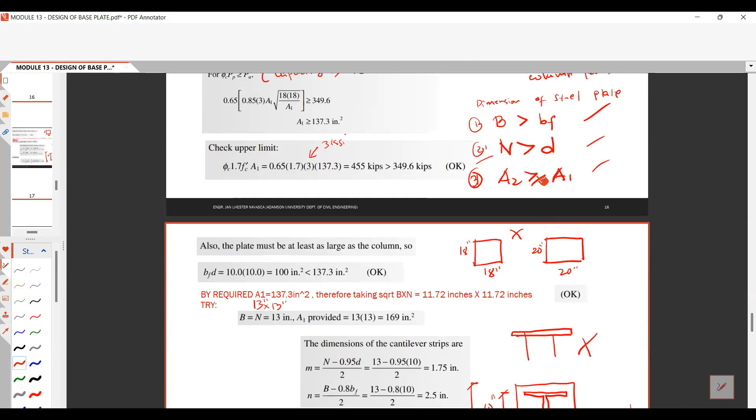And you can assume that your area 1 is less than your area 2, so you can use equation J8-2. After solving for area 1, check the upper limit and compare if that is okay. You may proceed to your solution, and take note of the 3 dimensions of getting the steel base plate.

Your B should be greater than your Bf, and your N should be greater than D, para mailagay nyo yung inyong column doon sa base plate. And para mailagay nyo naman yung base plate doon sa column pedestal, your area 2 or your column pedestal should be greater than or equal to your area 1, para mas madali nyo siyang ilagay.

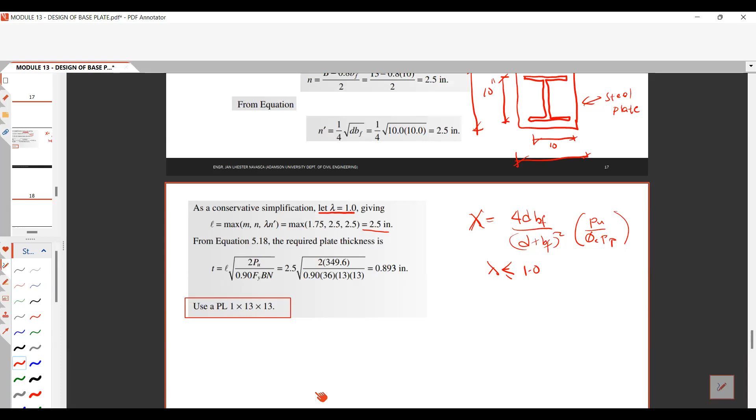And after that, check the required thickness, solve for the dimensions of the cantilever strip and determine the maximum. And you can proceed to the equation of the thickness, equation 5.18 or equation 5.20. So this is the equation for thickness for LRFD, and this is the equation for the thickness in ASD.

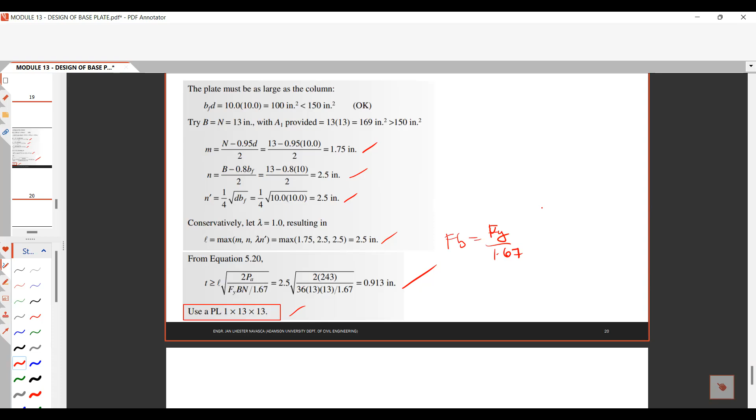Kung mapapansin nyo class, yung phi factor dito is 0.9 because this is bending stress, di ba? So yung bending stress is 0.9 Fy. And dito naman sa isa, that is also bending stress, that is FB dito is equal to Fy over 1.67. So kaya siya may ganyan. Okay, so any questions?